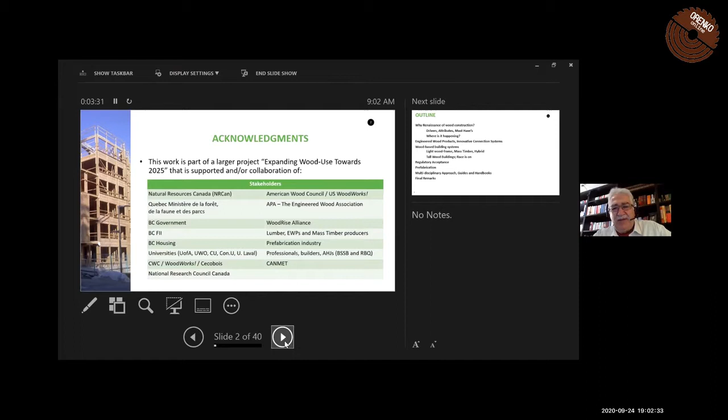First, I would like to acknowledge this work that I am presenting you is part of a larger project at FPInnovations, expanding wood use towards 2025. That particular year is the year that the next edition of the National Building Code in Canada is expected to be published. And we have quite a few stakeholders, and as you can see, this project is actually gathering a lot of organizations to be able to deliver impactful results.

I will start with why Renaissance? Why the rebirth? Why should wood structures come back? And I will get into drivers, attributes, must-haves, where it is happening. Then I will move on to engineered wood products, innovative connection systems. They make the building systems, actually, and I will talk about them. I will touch on regulatory acceptance, which is the codes and standards framework. Then move on to prefabrication and multidisciplinary approach.

Now, before I start my presentation, I listened to 2 presentations yesterday by Dr. Jakub Sandak and Dr. Callum Hill. And I hear from Professor Cenk Demirkır that these presentations will be shared. And I highly recommend, if you haven't listened to their presentations, they are almost so complementary to my presentation, probably also Professor Ceccotti's presentation, which will be done next. So these 4 of them all together give you a much better picture, sometimes in detail.

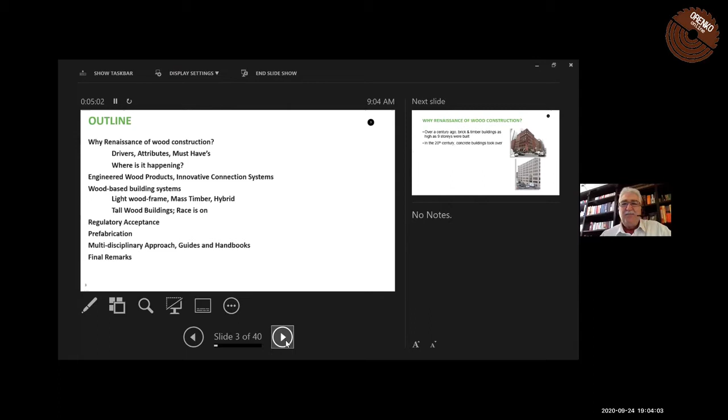So why Renaissance? Over a century ago in Canada, brick and timber buildings as high as 9 stories were built. The building on the bottom right-hand corner is a 9-story building. The facade is brick, and inside is all heavy timber, big beams and big columns. That building is 115 years old. Yesterday, Dr. Hill was saying we should get buildings to last longer. And that building is gonna last probably another century, easy.

And it has been nicely seismically upgraded in the 1980s, and those buildings, by the way, are getting very high-end companies renting them, leasing them, and there are hundreds of them throughout Canada and the US.

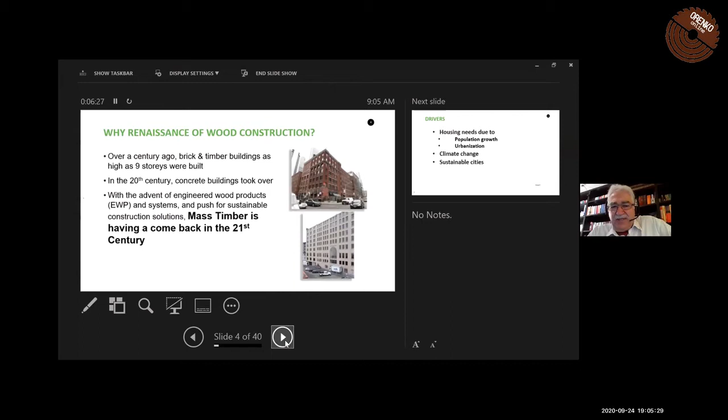In the 20th century, on the other hand, concrete buildings took over, and since then that trend is continuing. Now, with the advent of engineered wood products, I am calling them EWP in my presentation, by the way, and systems, and the push for sustainable construction, sustainable cities, mass timber is having a comeback in the 21st century. In the meanwhile, light frame buildings were always there.

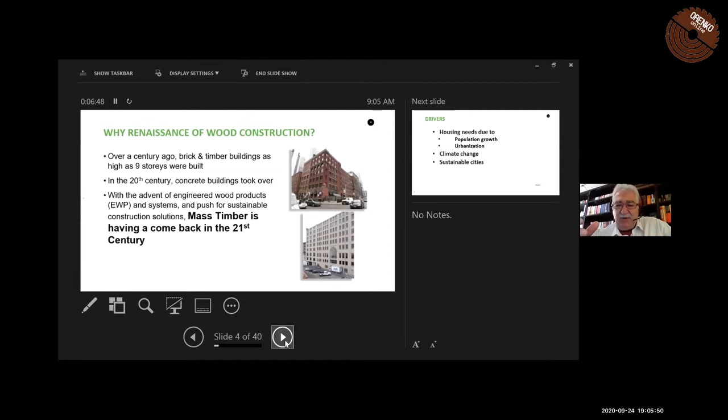Now, what are the drivers? Well, one driver is basically housing needs are increasing because we are having more people on our planet, and people are moving to the cities. So the cities are getting bigger. So that's one driver. And the other one is climate change is a big issue.

Actually, our generation has a big task to tackle that. And if we don't, we are putting the future generations in danger. And finally, because of this, we have to build sustainable cities. We cannot continue the way we are doing right now. There is no end to it.

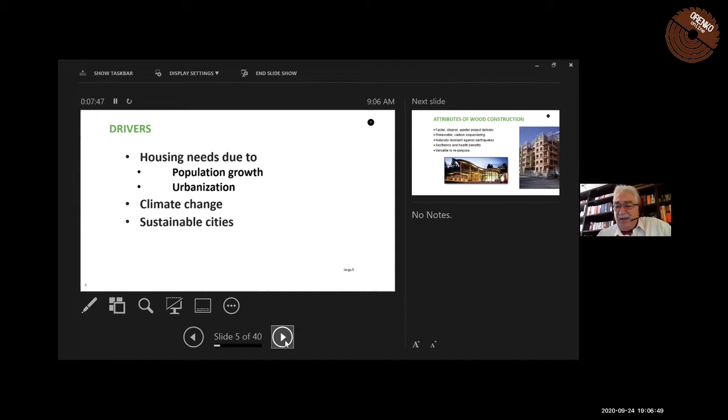Now I'm going to move on to attributes, because what attributes make wood construction appealing from these perspectives? First of all, you can have faster, cleaner, and quieter projects. And I will get into that with prefabrication and how that is possible. The second point, which was very nicely covered by Dr. Hill yesterday, is renewable and carbon sequestering.

The third point, which will be discussed by Professor Ceccotti after me, is that wood structures are naturally resistant against earthquakes because of their lightweight and the way they behave in earthquakes. And this has been demonstrated for centuries. For example, after each earthquake, when we look even in Turkey at very old structures, if they are not decayed, they do very well in earthquakes.

The aesthetics and health benefits, Dr. Sandak touched on them yesterday. They're very important points. And finally, versatile to repurpose. The heavy timber buildings that I showed you in my first slide, when they were first built at the end of the 19th century or the beginning of the 20th century, were industrial buildings, but they are now offices. They were repurposed.

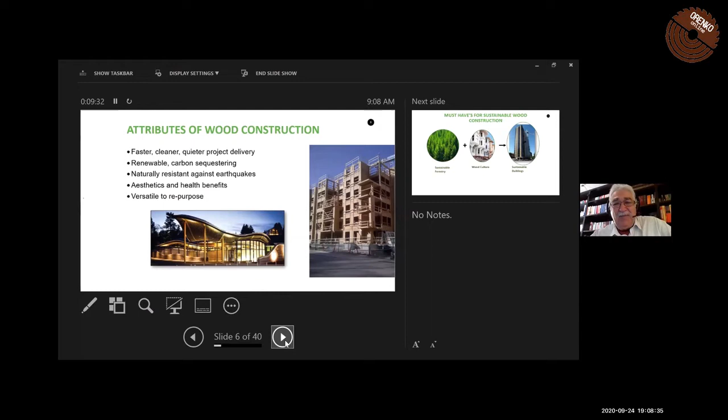So what are the must-haves for sustainable wood construction? This is very important in the sense that if you don't have sustainable forestry and sustainable manufacturing procedures, it is impossible to make the case. Well, that's not enough. You have to have a wood culture where you have wood manufacturing, designers, contractors, and the whole infrastructure. Some countries have them, some countries don't, but it has to be built. When you have these two ingredients, then you can talk about sustainable buildings.

The building on the side here is Brock Commons student residence, not in Turkey, in Vancouver, British Columbia. That's an 18-story building. I will talk about that building a number of times in my presentation.

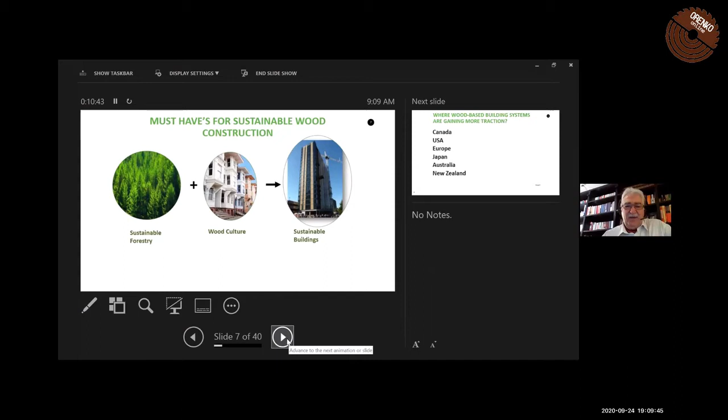So where are wood-based building systems gaining more traction? Basically, in the developed world: Canada, US, Europe, Japan, Australia, and New Zealand. That also talks quite a bit about where things are going, isn't it?

Now I'm moving into engineered wood products, innovative connection systems. And then I will talk about the wood building systems, separating them into two categories: light wood frame and mass timber. And also hybrid, because that's the kind of mixing wood systems with steel, concrete, and masonry.

I'm starting engineered wood products with lumber. It's either visually or machine graded. And then the next thing is panels, and that's either plywood or OSB, oriented strand board.

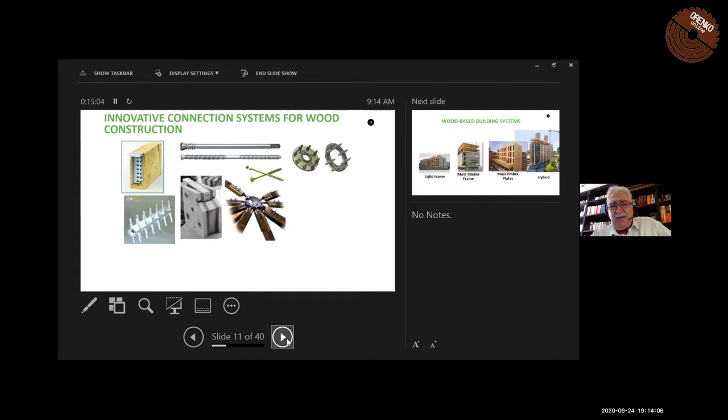The next item is the connections, because when you have the wood components, you need to connect them together to make a building, and that's very important. A building system is composed of connections and those components. Again, in the last couple of decades there are huge improvements and new products came to the market. They are all available now, and designers who are very familiar with wood design are making good use of them.

One of them actually is the self-tapping screws. Self-tapping screws are designed such a way that they have a little drill bit, designed like a drill bit, so you don't need to pre-drill the wood to put them in. They drill their own hole, and then that's it. So that's a huge new discovery in wood construction, and it's used a lot in mass timber construction now.

Now I'm going to get into the building systems. To make it very simple, we have the light frame and we have the mass timber. I am separating them into two halves: basically mass timber frame, which you can see some columns and beams here, and then mass timber plates, which can have walls and floors. And the hybrid construction, on the right-hand side, you can see the Brock Commons building. It is relying on two concrete cores as a lateral system. I will come to that again in that building.

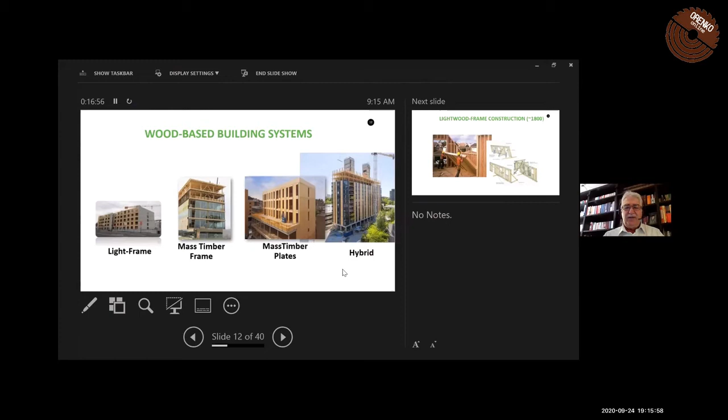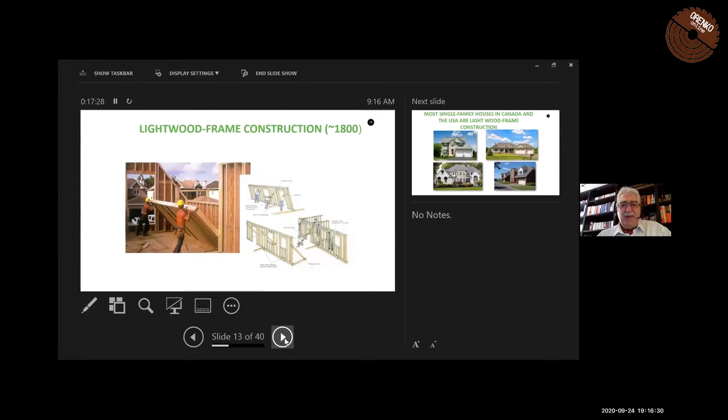Now, let me start with light wood frame construction. It goes back to the 1800s in North America and other countries. As its name suggests, it is light—for example, two workers here can lift that wall, and I wouldn't try that with prefabricated concrete walls; that will definitely hurt your back. This system is actually the most common system in Canada and the USA for single family buildings.

I don't want to give the numbers here, but approximately 90% of single family buildings are made with light wood frame. So this system was the dominant system in housing throughout the 20th century. We are not having a renaissance here. We are actually having a renaissance on the mass timber side. And these buildings...

Now in the last decade or so, or a couple of decades, in Canada anyway, we were able to build light frame buildings up to 4 stories because of the code. That was the acceptable solution. And in 2009 in British Columbia, the code people increased that to 6. Since then, that propagated to the different provinces, and now it is accepted nationally.

Over 60% of 5- and 6-story apartment buildings in Canada now are built with light wood frame construction. Again, these are not demonstration projects. These are real projects. The developers, construction people, and designers opted to use wood. This is quite an important fact for the world to watch.

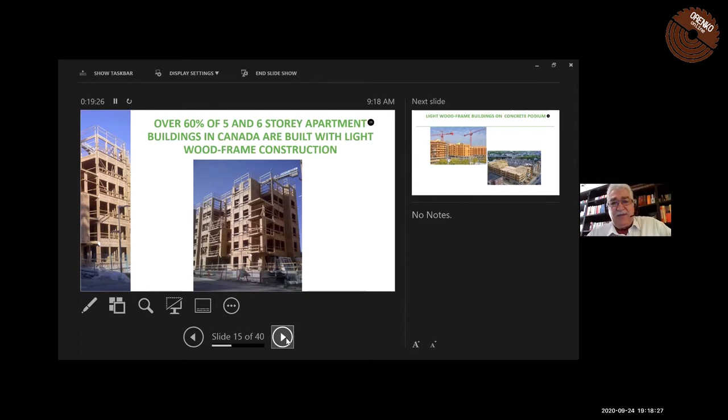So this one is quite important. Again, it's a competitive system. It's quite repetitive, and it is used a lot in Canada and the US.

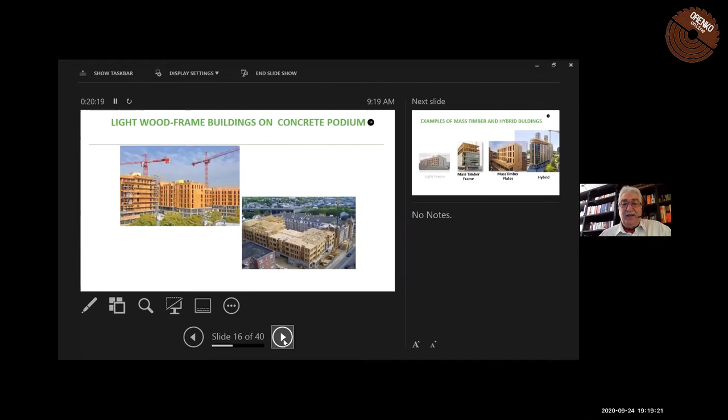Now I'm moving on to mass timber frames and mass timber plates and hybrids. I will give you some examples.

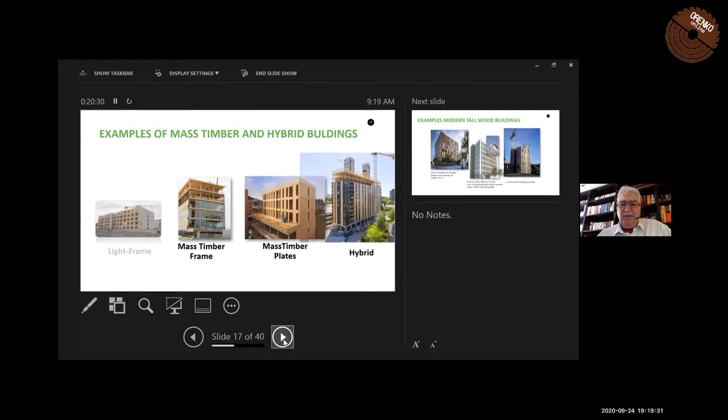One example, on the left-hand side, is the Wood Innovation and Design Center, designed by Michael Green. This building is actually about 30 meters high. It's about the same height, a little shorter actually, than the 9-story building I showed you at the beginning, which was built 115 years ago. So we are getting there.

The second building is an 8-story building. This building is built with a system called CREE, C-R-E-E. I highly recommend you take a look at their website, because this system uses concrete and wood together. Basically they were putting the building together at 1 story a day, 8 stories in 8 days.

The other building here is a 14-story building from Bergen, Norway. That building uses a mass timber braced frame. It's a frame around the building, you can see. Inside that building, they are using light frame modular blocks. And then every 5 stories, that building has a concrete story to carry the modular light frame apartment blocks.

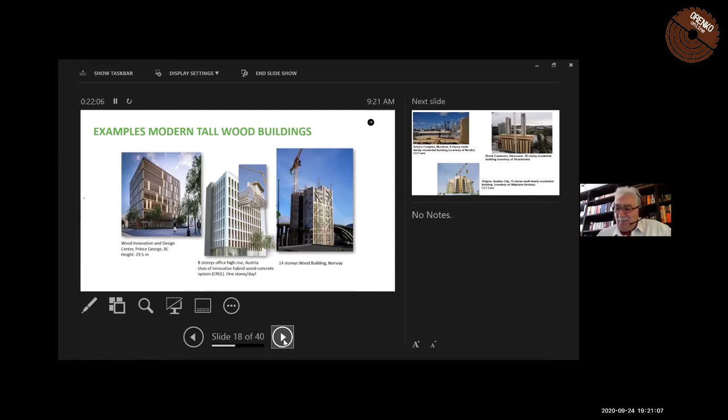A few more examples from Canada. The Arbora complex, one of the largest complexes in the world, in North America at least, in Montreal. It's an 8-story, multi-family residential building. The important part in that building is the core is made with CLT.

Also on the bottom, the Origine building in Quebec City, Canada, a 13-story multi-family residential building. The first story is concrete and 12 stories is wood, heavy mass timber. This building also uses a CLT core as part of the lateral system.

And the Brock Commons building, which I mentioned before: first they built the concrete cores for elevator shaft and stairwells, and then they built the mass timber above, for 17 stories. Again, this building has a first story of concrete and the rest of it is wood.

There is an analogy here for why the first story is concrete. There are many reasons, but you can also look at the reasons partially in very, very old traditional wood buildings in Turkey. Usually the first story is masonry. I'm not going to get into too much detail there because I have quite a few other slides to show.

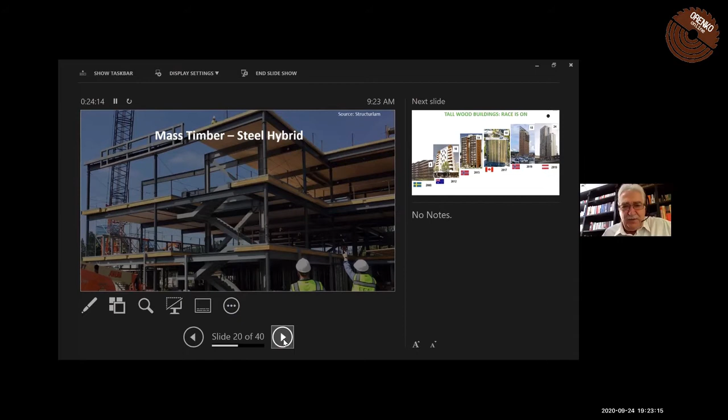Some engineers, including myself, think that mass timber can also be used with steel. For instance, in the Brock Commons building, they could have used a steel lateral system. There are great possibilities, and I just wanted to share this with you. Actually, designers, construction people, and developers should be open to using different materials for different applications.

So the race is on for tall wood buildings in the world. On the left-hand side, we had an 8-story building in Sweden in 2008. Then there were buildings in 2009 in London, England, and then 2012 in Melbourne, Australia, and then the Bergen 14-story building that I showed you.

The one in 2017 is the Brock Commons, and then the 18-story building in Norway, again using a braced frame system with some concrete floors this time on top. And finally, the HoHo building in 2019 in Austria.

So all these buildings are actually using different systems, and some of these systems will start to be repeated in the future probably, and those will be the winning systems, but we will see. There are quite a few other projects in the works right now. This is just a small number of them.

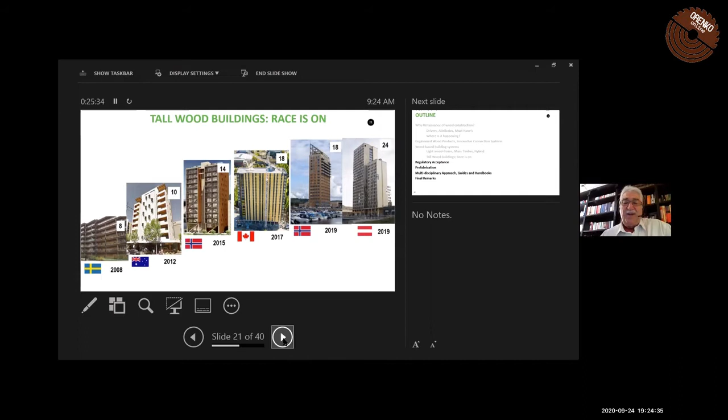Now I'm moving on to regulatory acceptance, and this is an interesting topic because codes and standards could be very boring for many people. On the other hand, regulatory acceptance, in one sense, means market acceptance. So it's a very important topic. And I will move on to prefabrication and multidisciplinary approach.

Now, regulatory acceptance - because of the way human beings chose that way, we live in different countries, and every country has its own building code. Interesting, isn't it? We could use one code, an international code. There were some attempts to do that, but not successful so far. So everybody has their own code, or construction directives. And there are thousands, if not tens of thousands, of committees dealing with it.

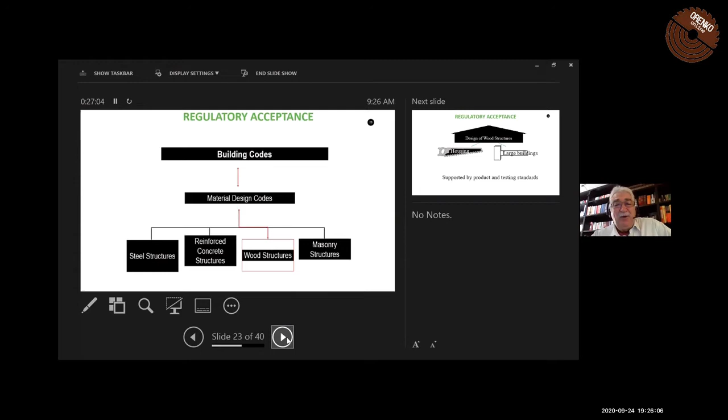Under the building codes, we have material design codes - one for wood, one for steel, one for reinforced concrete, and one for masonry. Interestingly, again, every country has their own. And then under this system, the whole structure is supported by product and testing standards.

The design of wood structures in US and Canada is basically split into two. One is for mostly housing, and in Canada for small buildings - it's very prescriptive, and that's what the house builders like. It's like a recipe, if you will - you will use this type of beams with this type of dimensions in this span.

The large buildings are engineered - the architect designs it, the structural engineer designs every aspect of the building. So in that sense, if any country would like to get into regulatory business, I always suggest they look at this aspect. For instance, Turkey can look at using Eurocode 5 for large buildings because of the proximity. But on the other hand, for housing, they may wish to look at Canadian or US codes. The whole system is supported by product and testing standards.

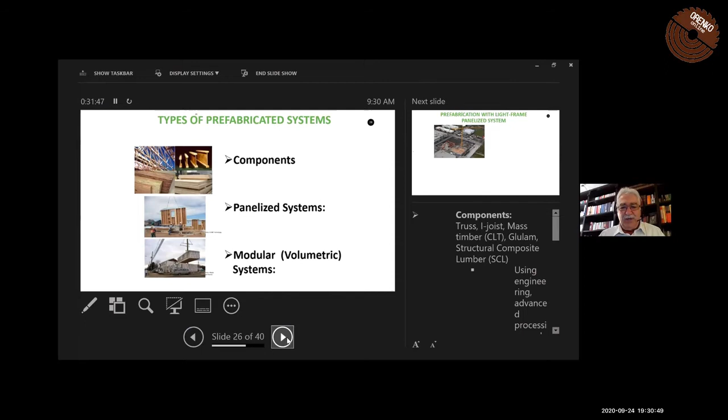And the last one is modular volumetric systems, where you basically build a three-dimensional box that you can transport, and then just take that to the site and put the building together. Some of them come with all the services as well. Digital tools are playing a big role in this movement.

Here's an example of prefabrication with a light frame panelized system. The panels come to the site, and a crane just puts them together. You don't need hundreds of workers to do this because the panels are already made. At the end, you achieve a building. Actually, when you look at this building, you cannot even say it's a wood building, but it's actually a wood building, including its lateral system.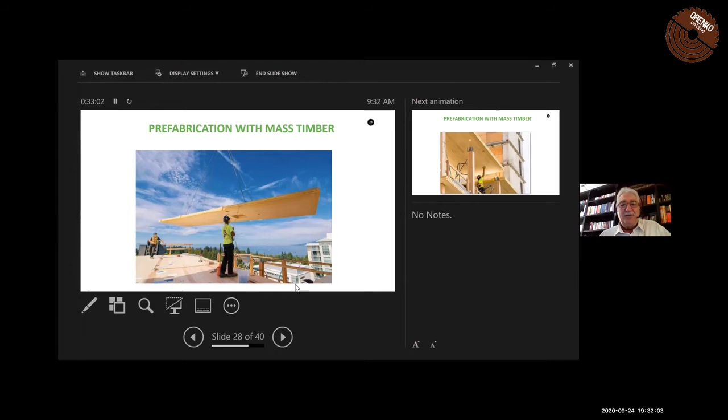This is, again, Brock Commons building. Students are having a beautiful view in Vancouver, British Columbia, in this building. And here it is. This building actually did not use any beams. And then we tested this concept in our laboratory, and they were very satisfied with the results.

You can see that this is a glulam column, and then on top you have a steel connector. And there is another connector just like that coming from the column from the upper story. And those two get into each other. And what happens is you transfer the vertical load from the upper column to the bottom column through the steel connector.

So that the CLT slab is not sandwiched there. Because if it does, then it's going to have some deformations, and when you have an 18-story building, those are going to be cumulative, and it will affect the building's compatibility with the concrete core there. So this is used in Brock Commons building.

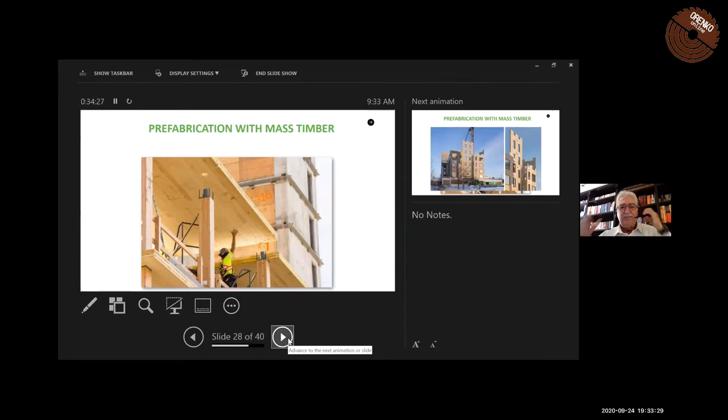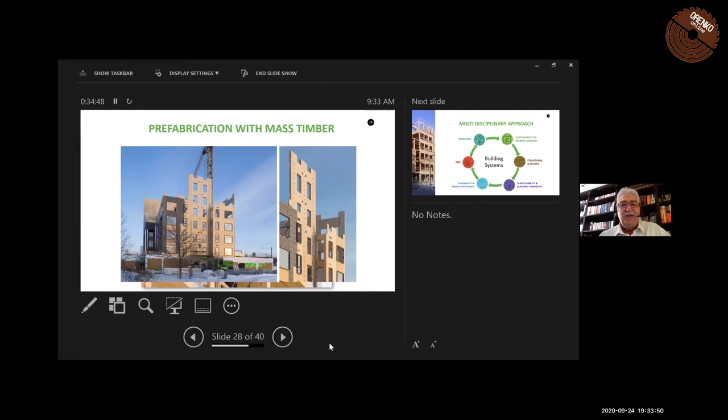And this is another example. This time, this is called balloon framing. So in platform framing, you have one wall at a time in each story. In balloon framing, you can have walls that are more than one story. And this is a CLT wall, more than one story, used in a mass timber building.

Now I am moving into the multidisciplinary approach that we are taking at FPInnovations in the last couple of decades. I'm a structural engineer by profession, and as I got into more research, I realized that everything we do in structural actually conflicts with the acoustic performance. Acoustic designers are saying you should make the building very loose, and we say what do you mean, it's not possible, and things like that. So the whole building system is a balancing act of different attributes: fire, durability, and others. In that sense, we started doing our research in a multidisciplinary fashion, and we are benefiting, and also disseminating our results.

And that is, I'm going to talk about our handbooks and guides. This idea kind of ended up with that, and we are doing this together with the design and construction community. So we have a group of designers, construction people, and authorities having jurisdiction, code people. We are working with them, and that makes it true applied research, in fact. And so I will give you some examples.

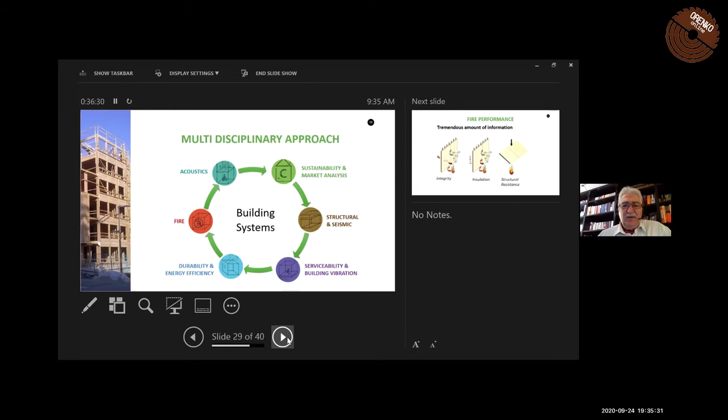Now, one of the areas that actually caused people to move away from wood was fire performance. There were huge fires, for example, in Istanbul. Istanbul was the capital of wood buildings at one time, believe it or not. But there were huge fires, and that triggered movement from wood to masonry. An earthquake comes in, and masonry doesn't do well, and then they go back to wood. Even in centuries past, people went back and forth between materials.

But now, in fire performance, we have a tremendous amount of knowledge, both in light frame and mass timber, for designing a building which is going to perform well in fire. There are encapsulation strategies and fire suppression strategies, and products like mass timber also have inherent charring capability in fires, which you may not have, for instance, with steel.

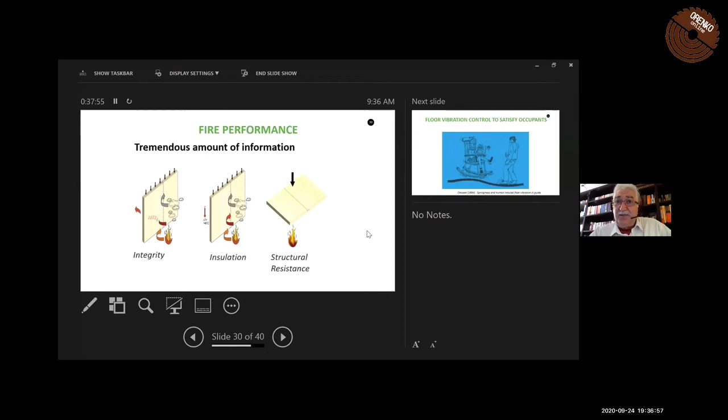Another area is a serviceability thing. I don't know if you ever noticed this in airports sometimes, somebody walks on the floor and it actually annoys people. Again, a huge amount of knowledge has been gathered in the last couple of decades on that, and it's being disseminated.

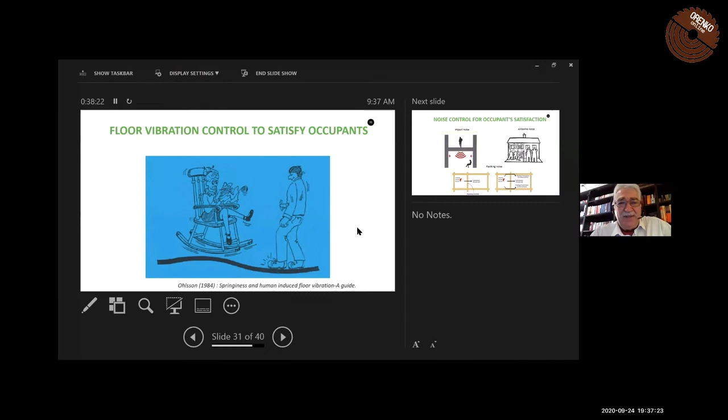Another area is noise control. Wood is a lighter material, and one of the remedies for controlling noise is mass. So again, there are lots of solutions, including some solutions with concrete. For example, concrete topping is generally used in apartments on top of the wood floors to reduce noise. I will also talk to you about timber concrete composite floors, which are used in different applications. But again, there are solutions with resilient channels and other things that have been disseminated. The knowledge is there.

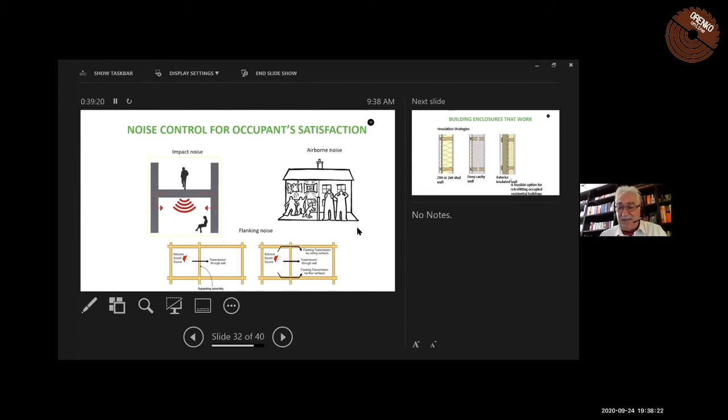Another item is building enclosures, especially from an energy efficiency point of view. It's very important to make building enclosures durable and at the same time energy efficient, because sometimes if you don't do it right, you can create durability problems, which we had in the past. But now we have the know-how, and in our handbooks and guides we are giving this type of information for building enclosures.

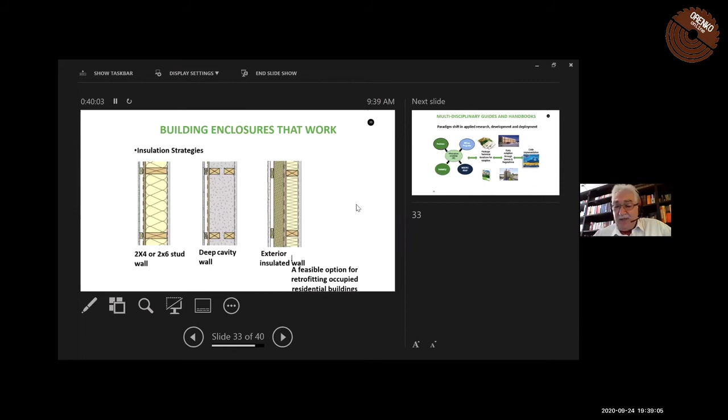So all that information gathered throughout the world, I call that what we found, actually came from the research group. It's a paradigm shift, working with the design and construction community, taking all the research information and packaging it in a multidisciplinary fashion in handbooks and guides.

And then early adopters, the people we work with, the engineers and contractors, are our early adopters. They take what we have and apply it to buildings. And then at the end, that information from handbooks, guides, and buildings finds its way into the codes.

Now in Canada, this year, our building code is coming out, the 2020 code. This code is going to allow mass timber construction up to 12 stories. A lot of fire testing, fire analysis, and other studies were done, and the commission accepted it. The proposals came from the Canadian Wood Council, so basically we will have 12-story mass timber construction for the gravity system.

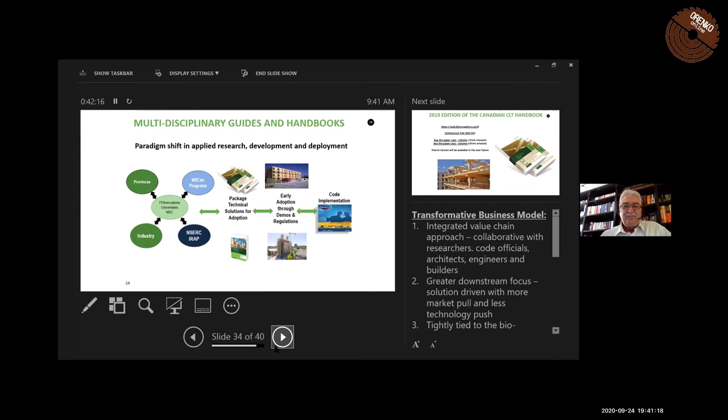Now I am very pleased to report that FPInnovations is making these publications free to download. You can download the 2019 edition of the Canadian CLT Handbook, which we recently published. This is a 2-volume set, over 800 pages, with information on CLT from manufacturing to the construction side.

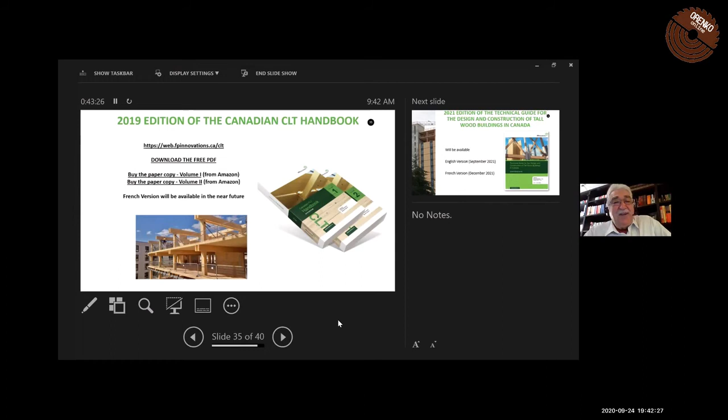It also has a design example this time, an 8-story mass timber building — not only CLT, but glulam and mass timber and CLT. That was a big effort, and I am very pleased to be one of the co-editors of this with my colleague Sylvain Gagnon. You can also buy a paper copy. I'm one of those guys who still likes to flip the pages physically, but that one you have to buy from Amazon.

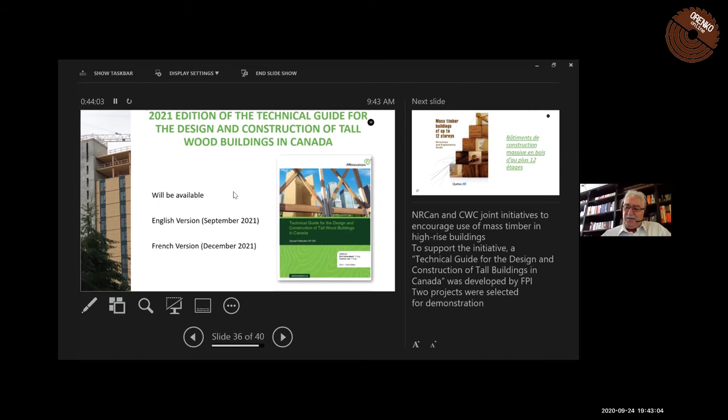The other publication we first published in 2014, but now we are updating it. This is the 2021 edition of the Technical Guide for the Design and Construction of Tall Wood Buildings in Canada. This will be available next September, so please take note and download that one too — it will be free to download again. This publication tells you all the recent progress we've made in tall wood buildings.

Using our publication, we worked with Quebec code people, and they published this Mass Timber Buildings up to 12 Stories guide. You can download this from their website, with the link in my presentation, and again it's free to download. This shows that Quebec, as a province in Canada, first allowed 12-story buildings, and now that is making its way into the national code.

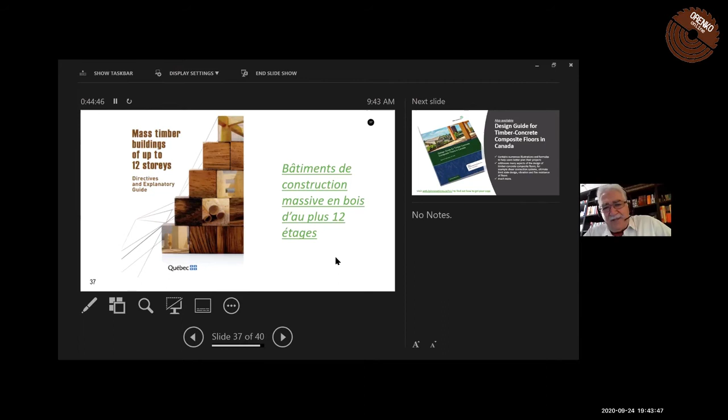And lastly, I talked about timber-concrete composite floors. Timber-concrete composite, again a concept that came from Europe, uses timber on the bottom, concrete on top, with some steel connectors connecting the two. This is a very good system for, for instance, spanning something like 9-10 meters. One of my colleagues, Samuel, developed, in consultation and cooperation with others, a design guide for timber-concrete composite floors, also available for you to download from this website.

As conclusion, the 21st century is experiencing a renaissance in mass timber construction. A wealth of engineered wood products and connection systems are available. Advanced technologies in fabrication and design are available. There are numerous hybrid possibilities with wood, concrete, and steel. I would like to suggest that having a wood construction strategy is well worth it, and the knowledge is all out there. Thank you very much.

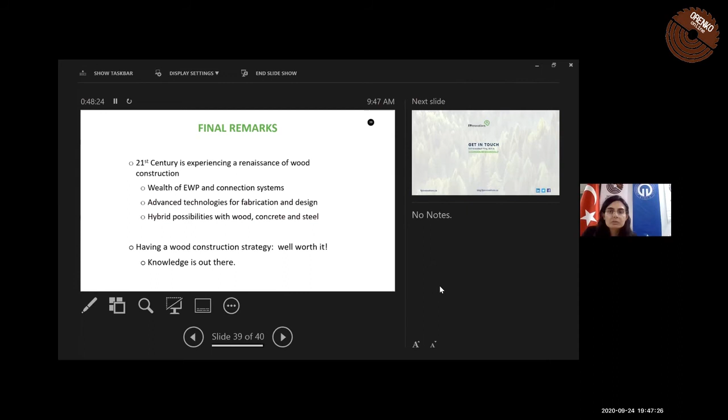Could you repeat the question one more time, please, for me? What is the disadvantage of hybrid systems compared to mass timber? When or where do you suggest we shift from one to another? Oh, that's a very good question. Thank you.

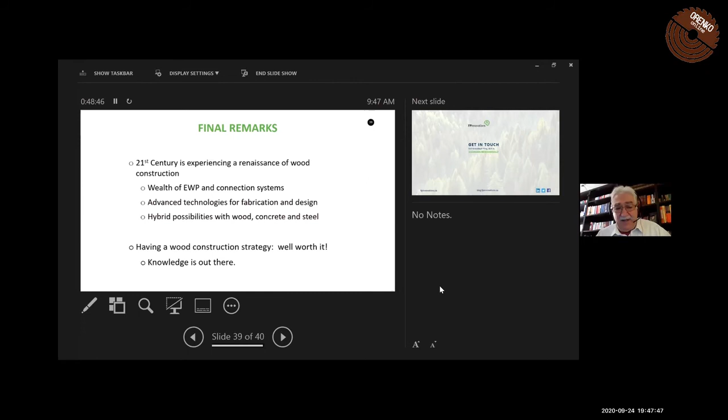Basically, it all depends on the engineer. And now, for example, when you have a building where your lateral forces, either from seismic or wind, are extremely high, and it is a very tall building, and the geometry doesn't make sense to make, say, a CLT core work for you as a lateral system, this is the time I think the designer should be open to use a steel or concrete lateral system.

And that's one of the examples that I can give for the hybrid. It's ideal, of course, to use one material because you can reduce the compatibility problems due to shrinkage, etc. But on the other hand, sometimes it just simply makes sense to make a choice, and that is driven mostly by the loads. So that's one example. It all depends on the building geometry, the loads, and the capability of the systems.